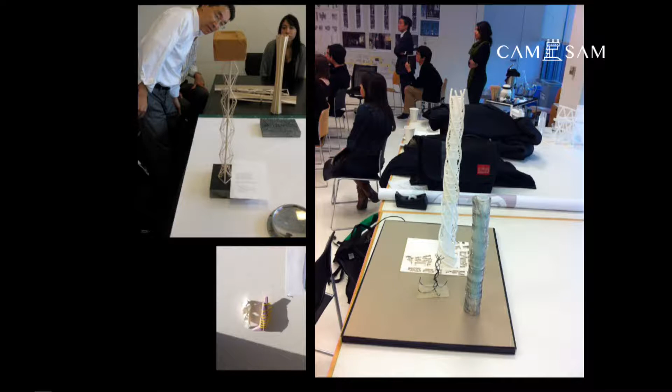I'm a structural engineer, and in our firm, SOM, we practice as engineers and architects together. And we think about design from a perspective that comes from organic forms, from art, from experimentation. So working with universities to develop new ideas, whether they're tall buildings or short buildings, what can we do to change the way we think about design? And most importantly, what can we do to change the path, which we believe is a destructive path on the environment?

Cities are developing around the world at a rapid pace, whether it's in Mexico or Shanghai. And the impact of these cities on the environment is substantial. So the use of natural resources, the embedded carbon that's part of the buildings as we build them, and the carbon that's emitted when we operate these buildings are all creating a great impact on the global, both economic and most importantly climatic situation. The last century, we saw climate change in temperature of 1.5 degrees. We expect that in this next century, it'll accelerate. So greater temperature change.

When we build buildings, most of the buildings that are of great scale, let's say at least 20 stories or more, the amount of embodied carbon in the structure, in the building, the day we built it, in most cases takes 20 years to be overcome by the operational carbon from mechanical systems and lights and so forth. So the day we build, in many cases, is just as important or more important than the operation of our buildings.

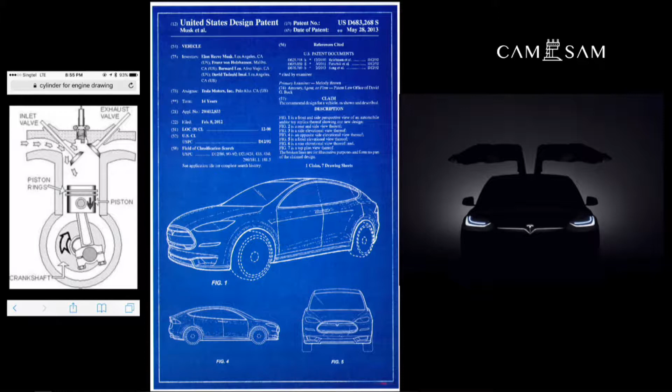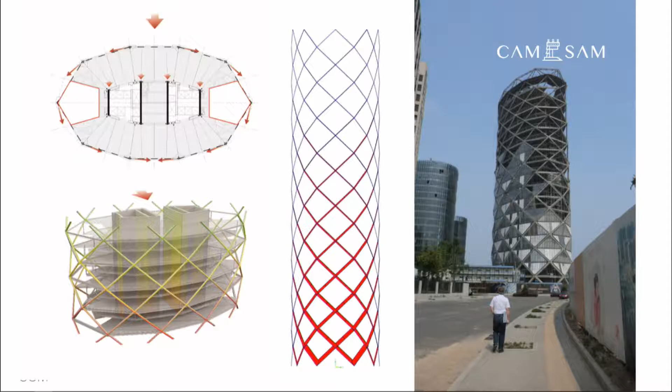In buildings, it's an idea of creating form that is efficient, creates great architecture, we hope. Ideas that are stable, but ideas that take forces and allow forces to flow around a form, to balance gravity loads against seismic loads and wind loads. So taking the helix in this case and allowing the forces of gravity to flow around the entire form to help resist the building from overturning in wind or seismic events. The idea of balancing the placement of material and making the building as efficient as possible. That's our goal. And then creating great spaces.

Spaces where people use and are inspired, whether it's at the base of the building or it's how we interact with the building throughout the elevation of the building and how we celebrate structure as part of the experience. That's our hope, to take the ideas that are fundamental to design and create something that is really unique.

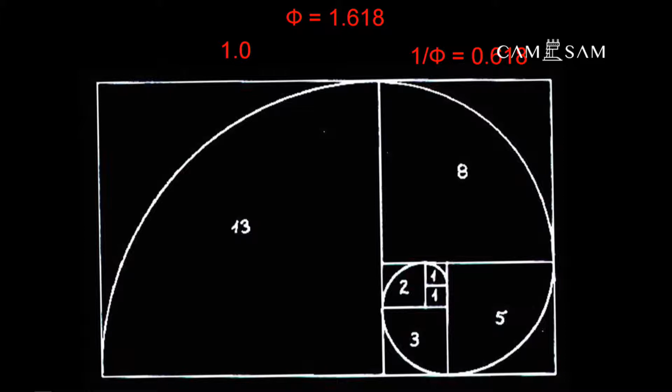The Fibonacci sequence is something that a lot of us have studied. Many people think of it as an incremental series of numbers, but it's far more powerful than just a numeric exercise. The relationship of numbers is interesting. There's a constant that emerges. So the relationship between 13 and 8, for example, is the constant that you see at the top, 1.618. And if you continue out on the Fibonacci sequence, you'll find that, like pi, the number converges. It becomes much more accurate.

So what does it mean to us as designers? Well, it means that it's a search for where it exists in other places. So in nature, the way plants grow, trees, small plants, is impacted by this constant. It's impacted by the geometric lengths of arms of the tree. It's impacted on the numerics that help us describe growth. The leaf in the northern hemisphere on most species of plants points south first. Why? Because that's where most of the sun is seen throughout the year.

But then the question is, where does the next leaf point? Well, in the northern hemisphere, the next leaf will point 137.5 degrees off of the first leaf. And you wonder, well, why is it 137.5 degrees? Well, it's because every single leaf that sprouts after the first leaf will never cover a previous leaf. And you can do that. You can take 137.5 and plot it on a circular pattern. No dot will ever cross a previous dot.

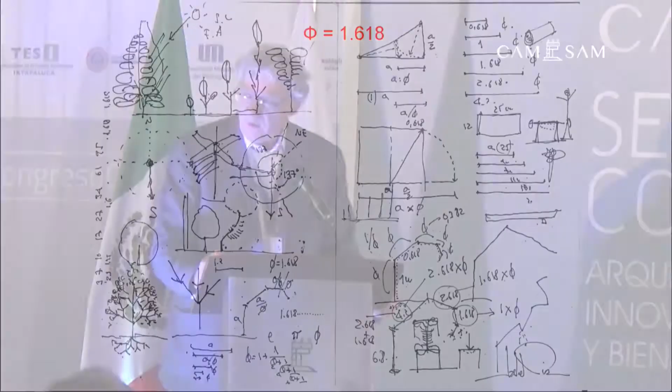So here's the factor again. Well, if you take 137.5 degrees and you relate it to a 360-degree circle, you find that the constant reappears. It's not random. It's in all of us. It's in the way the hair on the top of our heads grows. It's the way the universe has been created. It's the way plants grow. And maybe it's the way we design buildings.

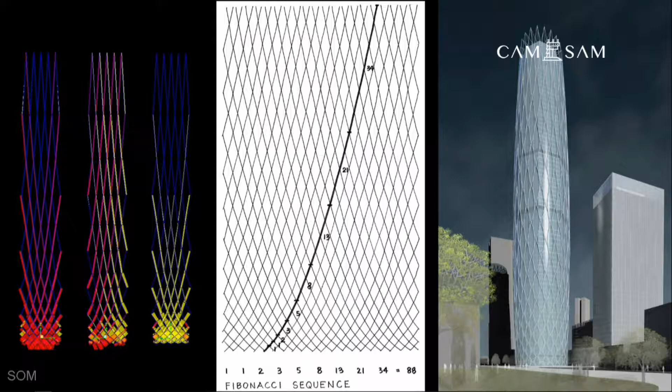So if we take the Fibonacci sequence and we allow it to radiate vertically, perhaps we can create framing systems of structures that respond in a way that's not linear. It's greater density at the base where the demands are highest, least density at the top, and you can see the orientation of the bracing changes as we go over the height of the building. We're finding that with this type of philosophy and design, we can save 20% of the material in that frame.

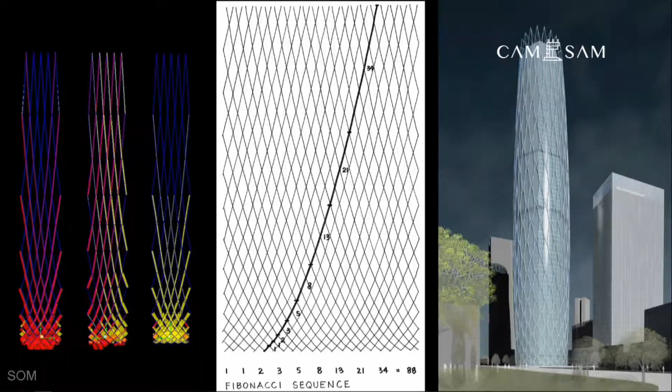We're looking at buildings not like beams and columns. We're looking at them as forms, as geometric forms, whether they're volumes or in this case, 4 planes. And what we find when we apply load to these forms is that bracing patterns emerge that are much different than we're normally used to.

You would think that the bracing pattern for this tall building would be concentric. In fact, it's not. It's a high-waisted brace. This is the most efficient way to resist lateral loads for this tower, for those points of support at the base. 3/4 to 1/4. It's not symmetrical.

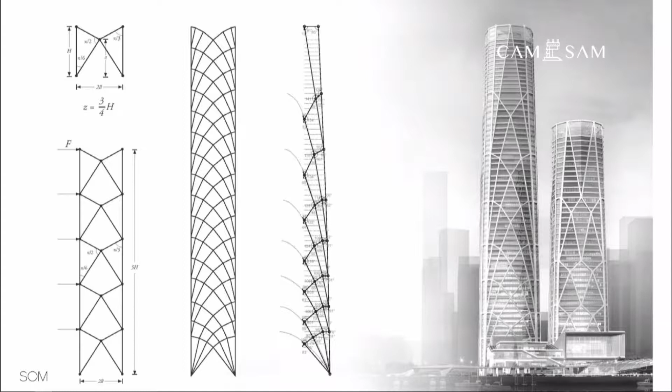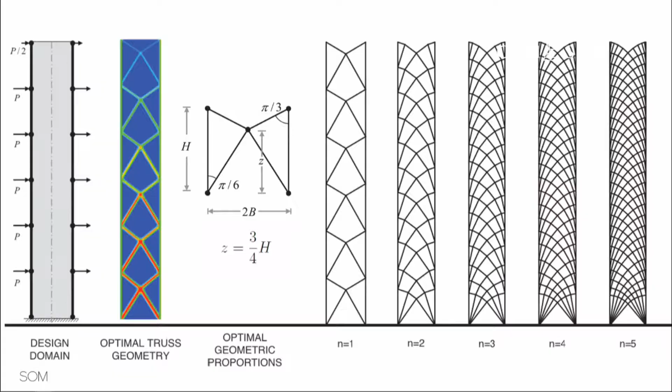And we're taking these optimization platforms, and we're creating first the theory on the left, and then we're interpreting the architecture from the engineering. So it's not such a sterile response. It's a much more organic response. And it's a progression. It starts with the basic idea, the form on the left, the initial engineering idea that's the most efficient, that's in the middle, and then there's a hybrid consideration.

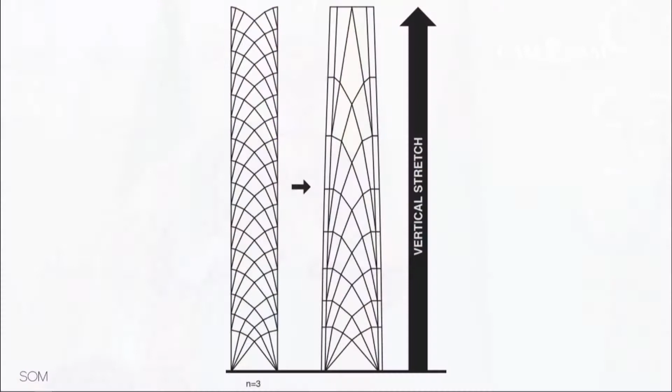Taking that initial idea, in this case as the chassis, and then stretching it over the height of the building to create something that we believe is organic and beautiful and efficient in terms of the way forces are managed.

But in tall buildings, in areas of high seismicity, it's a question of stiffness and softness. Stiffness related to winds and daily events, and softness related to the earthquake when it comes. Dissipating energy when you need to. So creating fuses within these tall building structures is the answer. So we think we've discovered that this combination of stiffness and softness is the answer to tall building design in areas of high seismicity, like here in Mexico City.

You can take these ideas and turn them on a horizontal. So it doesn't need to be a tall building. It could be a bridge, or it could be a long span building. And if you simply mirror the idea around the center point with 2 points of support at the outside, you find that you create a structure that takes the tall building philosophy and puts it on the flat. And it takes that 3/4, 1/4 geometry of bracing in the tall building, and it puts it into the frame of the bridge.

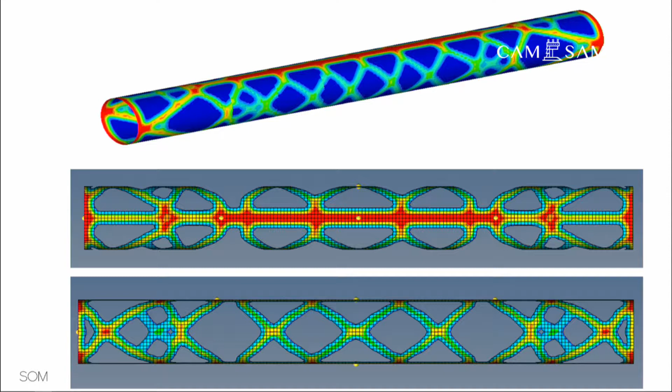This is a helical, it's a circular or an elliptical pattern. You could use it on any geometry. It could be square. You can do it in concrete or in steel. But you can see that these bridges of the future might look very different than they have been in the past.

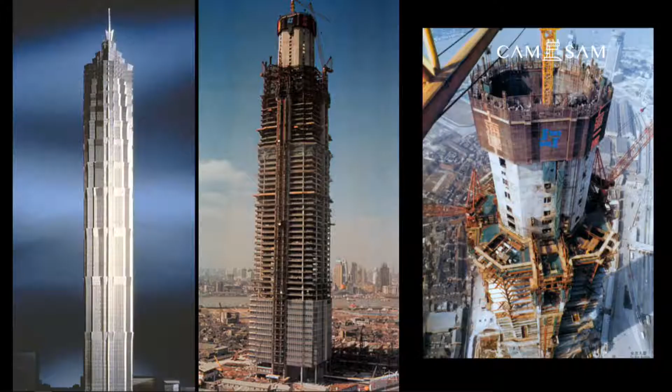So tall buildings are a challenge. They're a challenge of place, material, technology. When I was a junior designer at SOM in Chicago, I had the opportunity to design this building. It's 420 meters tall, and it's in Shanghai. It was the 3rd tallest building in the world. It's called the Jinmao Tower.

And at a Saturday night event with my daughter, we together solved the problem for this building that was really difficult. And you can see the model that's here in the foreground.

My daughter now is 29 years old, by the way, so just to get a sense of time. I have different glasses, by the way, too, and my hair's a lot whiter now than it was then.

But what we did is we took this model, and why did we create this model? We wanted to create a natural force flow behavior in this tower, not for restraint, but actually to allow it to move during construction. So we had these big trusses that connected to the central core, then connected to the outside big columns, the mega columns, and there were 8 big columns.

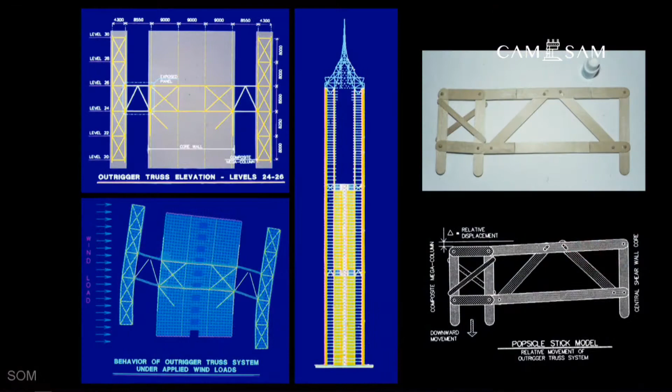And what we found was when we interconnected them for lateral load resistance, we found that if we built the building from the ground up, the creep, shrinkage, and elastic shortening that this building would see between the core and the outside columns would literally rip the trusses apart because the trusses were so big.

So we introduced pins into those trusses to make them behave like mechanisms using wood dowels, tongue depressors, popsicle sticks. Slots were needed and pins were needed to allow the structure to move freely during construction, attracting no force.

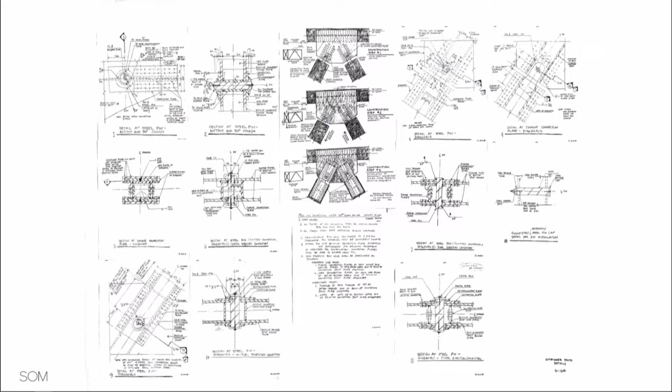We developed the idea into the working drawings, first starting by hand calculations, and then into the computer-generated working drawing on the left, to the shop fabricated, prefabricated units on the top right. You can get a sense of scale on the lower left of a man from SOM that was on site. The pins are in that connection. And the idea is that the pins were in place, in the image on the lower right, and then the bolts were inserted after the building had a chance to breathe.

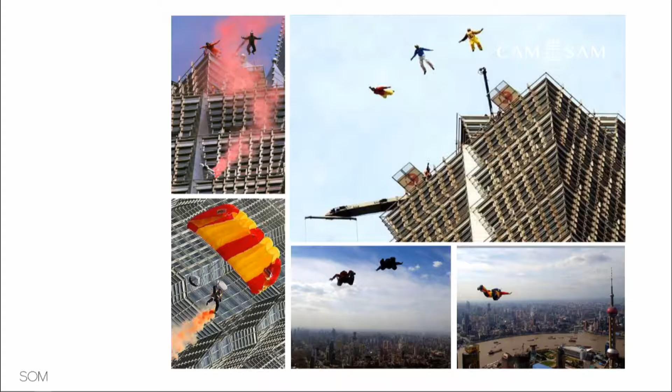So the building today is a success. People jump off this building. People climb this building. And people do things that are kind of crazy, which by the way, I wouldn't do this. So anybody that wants to do this, fine. But this is off of the observation deck. It's the 88th floor of this building.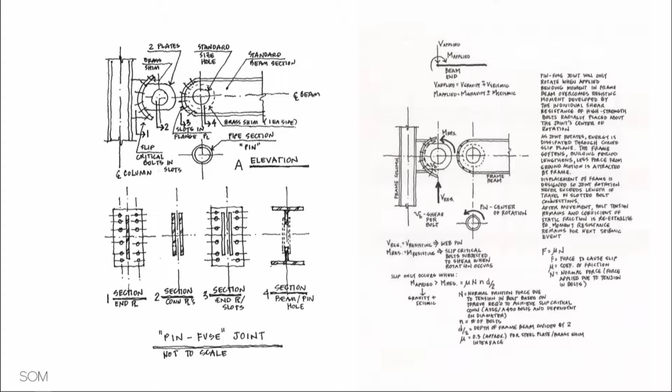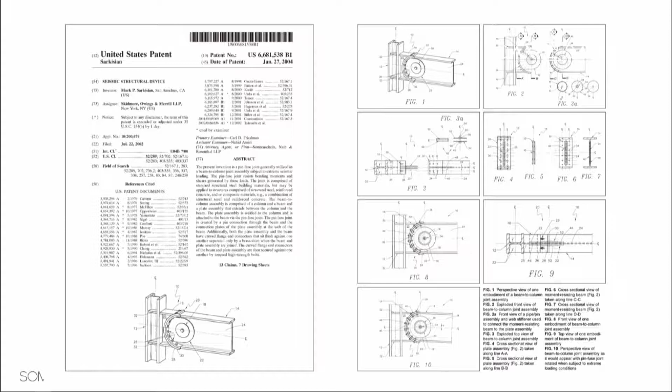So like our bodies, the connections that we have, they're responsive. A lot of times they're not being used. Sometimes they're being used in a way to lift materials, but always they're used in a way that has free motion. Our buildings, on the other hand, typically do not. So how can we introduce pins into our frames of our buildings to allow them to work more like your body than welding beams and columns together in a perpendicular way where it's an abnormal behavior. It's a high concentration of force.

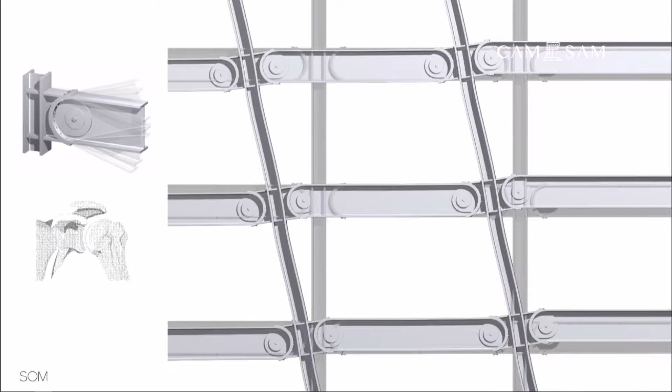So imagine frames in the future looking like this with pins that allow for the joints to be fixed during most of the life of the structure through friction. So the curved plates have a friction material that's clamped together. We understand the coefficient of friction. We understand the clamping force. And we understand when it'll slip when the demand is high enough. It dissipates the energy without damaging the base building.

That's the idea. So long range, the idea of carbon, buildings being in service is really important in the final state of our designs so that we don't have to repair them or take them down and rebuild them.

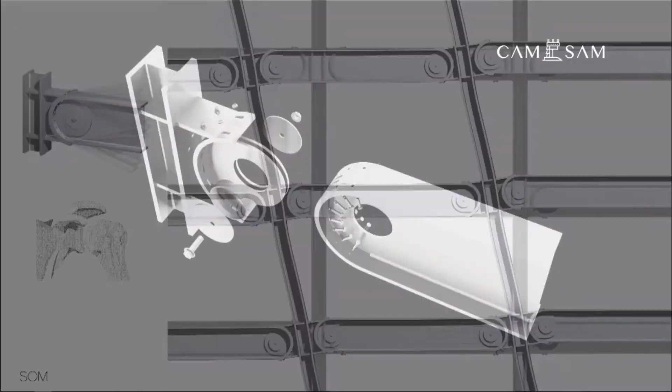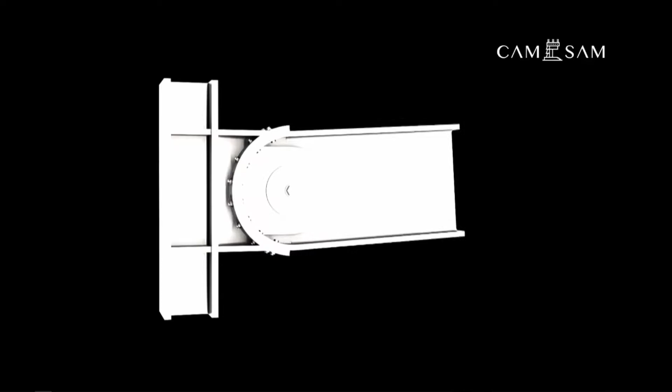So the idea is to use basic building materials that we have available in the marketplace today. Wide flange beams, hollow sections, circular sections that could act like a pin, high strength bolts, friction materials like you use in your car, in an automobile, to create these joints that allow this movement to happen when we want it to happen.

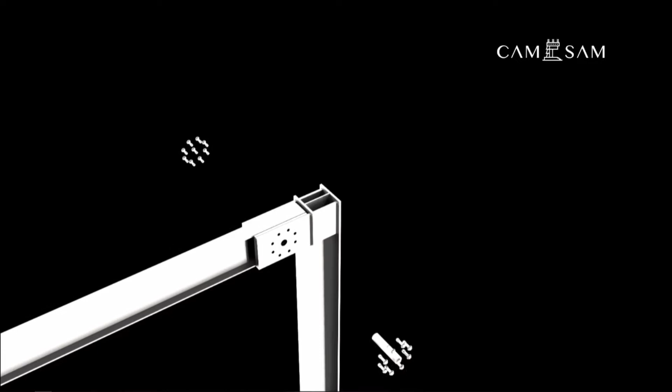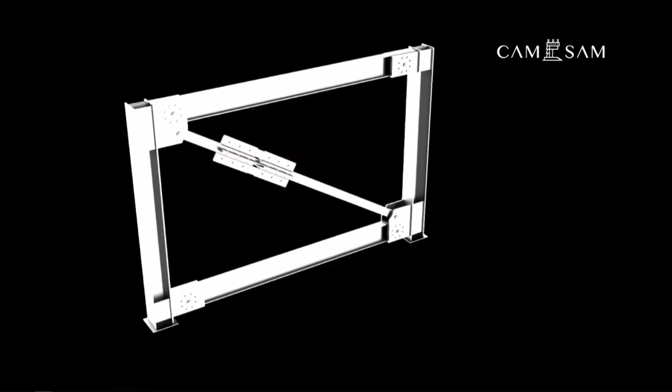We can use this idea in frames, stiffness and softness that I talked about earlier. So braced frames that at the time of a major earthquake need to dissipate energy, but when they're in their normal life, normal operations, they are there to provide stiffness of the structure until the big earthquake comes. But dissipate the energy, protect the structure through this idea of friction. Allow the joints to have circular bolt patterns so that they can rotate freely when needed.

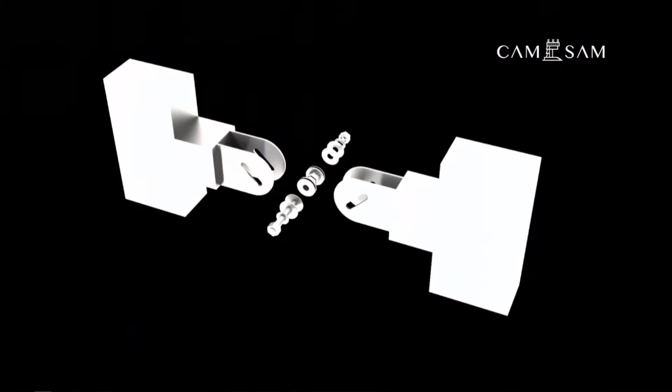And even in structures that have shear walls, we do a lot of residential construction that is concrete. We have links that occur in the elevator lobbies typically to dissipate the energy. Use steel, in this case, in a butterfly pattern that's allowed to dissipate energy when needed.

You can use these ideas in places where you run into trouble, where you have problems, when you're designing a building and you discover that you just can't quite solve it. This structure is in Beijing. The idea was to create the tallest and widest cable net in the world, 90 meters tall and 60 meters wide. And what we would do is hang a mid-height structure, which was a museum, and allow that hanging to do two things: to support the gravity loads for that piece, but more importantly, perhaps, to take the lateral load

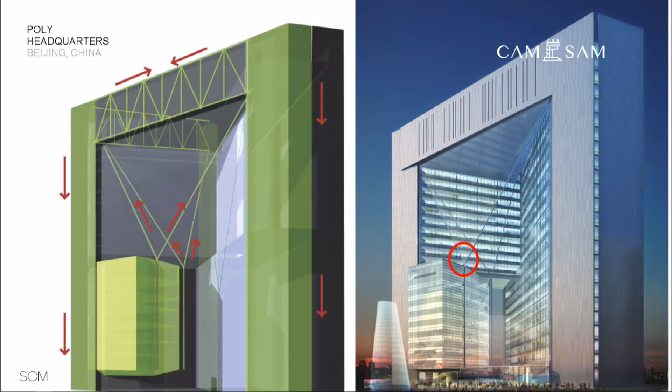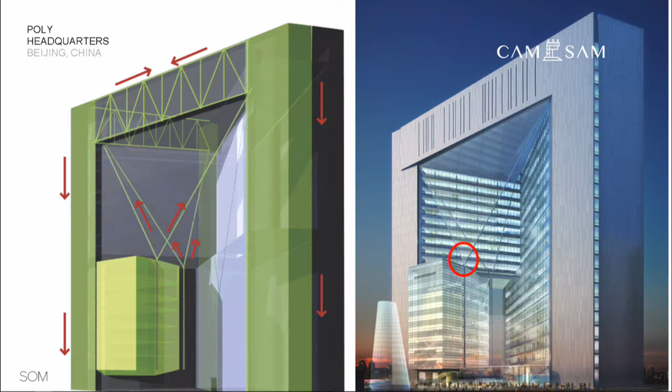of this cable net. But we found as soon as we connected it to the top of the museum, it acted like a mega braced frame in an earthquake. It attracted so much force that we couldn't engineer the diagonals. We'd put material to respond to force. We couldn't design it. We'd put more material, it would attract more force. So we needed to come up with a way to allow the building to act freely during the earthquake.

So what we did is we started with the fundamentals of pulleys. The idea that the pulley, when a cable would run under the pulley and it would move from side to side, the force in the cable wouldn't change very much in motion. But our architects wouldn't allow this huge drum that we would have to create for the size of the cable that we were using. So we came up with this idea of pins, 4 pins with plates

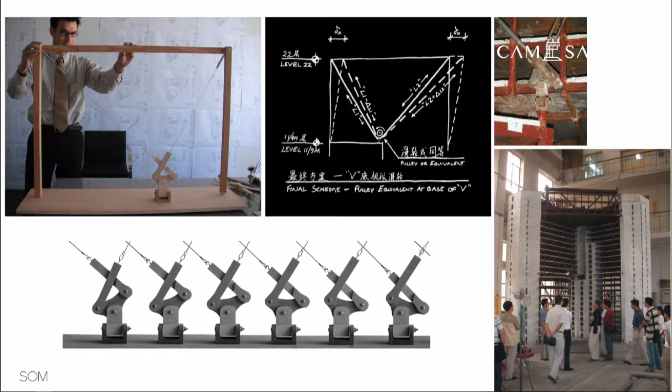to allow the same motion to occur. We took those models and created the in-place structure, which could be used to resist these lateral loads from wind on this large cable net, but also provide motion when needed in the large earthquake. So it is still today the largest cable net in the world, and it's designed to move, even though when you see the building on the outside, you may not see the connection, but from the inside, you certainly can.

So there's a couple of places where we've written about the work. One is in a book for Detail. It's a German company that publishes a lot of architectural details, but they asked us to do a book on structures. And then a book on tall buildings that came out of work with schools, Stanford University in particular, about the idea of structure as architecture in tall buildings.

And what the book does is it takes you through the steps of the site, where not much is known except for the natural characteristics, all the way through some more of these advanced ideas that we're talking about today in terms of the impact of nature on design. So there are resources that are available if you're interested.

It happens at great scale. It's not just at the top of your head or the growth pattern of a plant. These geometries are not random. They're important, and they're embedded in motion, and they're embedded in the way we see dynamics. So in simple wave theory, as you touch that string and change the boundary conditions, you can see that there's a different dynamic characteristic, right?

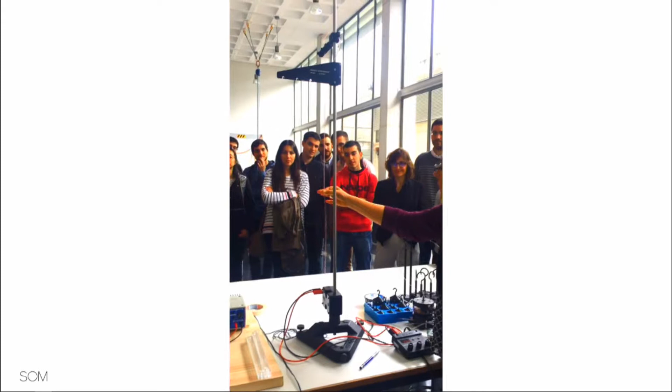Imagine that everything is in motion. Everything. We're in motion. This building is in motion. The planet's in motion. That's the philosophy. So 50 years ago in San Francisco, it was the summer of love, okay? I wasn't there, actually. I was pretty small. But anyway, this whole freedom of ideas, right? Freedom of form, motion. That's what we think is important.

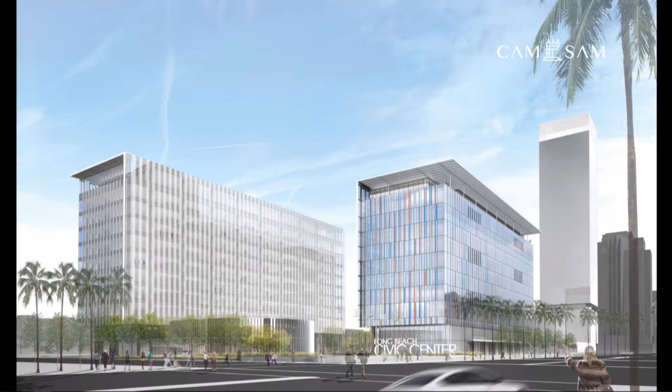And that's what we think actually can get into buildings that are not super tall. Buildings that are shorter. In this case, in Long Beach, California. 2 fairly short office buildings. Simple in plan. Core systems, columns, open office space, structures that consist of shear walls, and post-tension slabs between the shear walls and the columns. But we wonder, what about all these ideas for tall buildings could maybe be appropriate here? And what about wave theory?

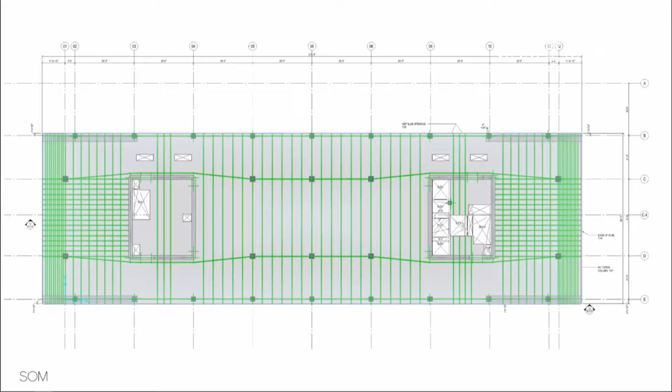Typically when we post-tension these slabs in our buildings, and many of us in the room are involved with this, it's a linear approach with cables, right? They drape vertically, but usually in the horizontal plane, there's not much variation. And this is what we've been doing for literally 60 and 70 years in our buildings.

But if you look at the force flows, they're much more organic. They're like flower patterns. They're not linear. It's not point to point. This is the most efficient path. And if you superimpose an idea of where the structure might be, all of a sudden something beautiful appears, and it's not a straight line.

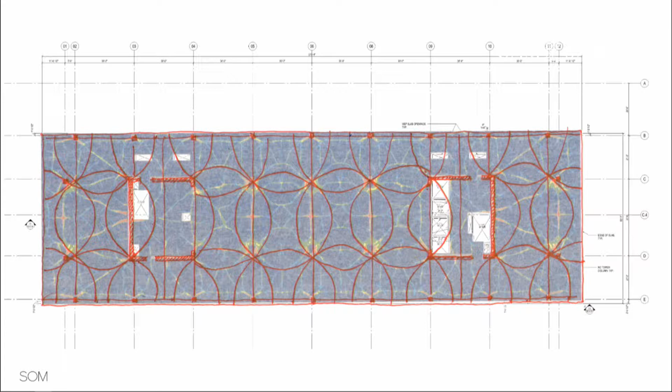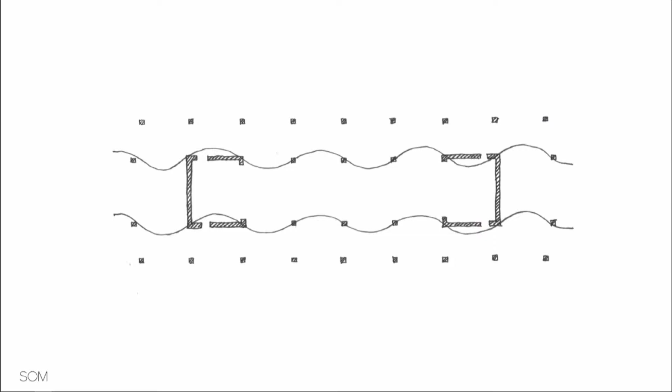So wave theory and placement of cables that you can imagine that are now in the concrete, in one direction, then another, and then the combination of the two, and then the other direction, the other, combination. And when you combine them together, something really beautiful emerges. It's a pattern that looks more like Vesica Piscis and the origins of the universe. And I'm trying to pull this all together. It seems like a stretch, but it makes sense that the mathematics have got to be the same.

So you can take this and you can create grids of placement of material, elevationally and in plan. And what you see are these intersecting circles that form the structure. You can reduce the material by almost 30% when you use an idea like this. It's important for us to think about in our designs.

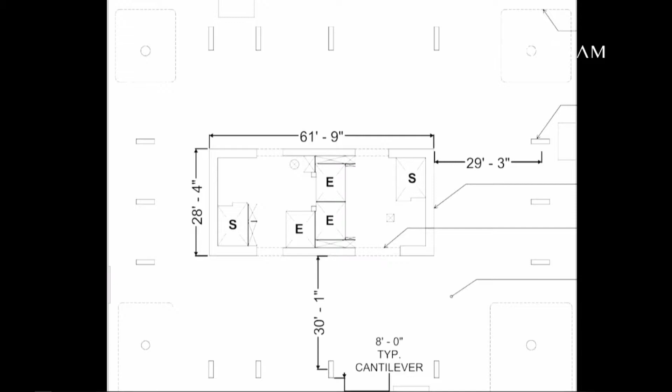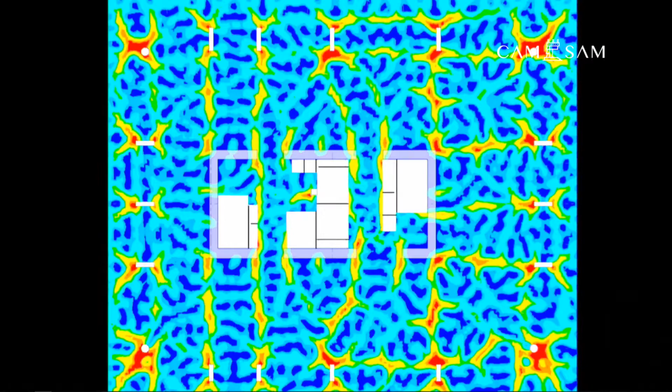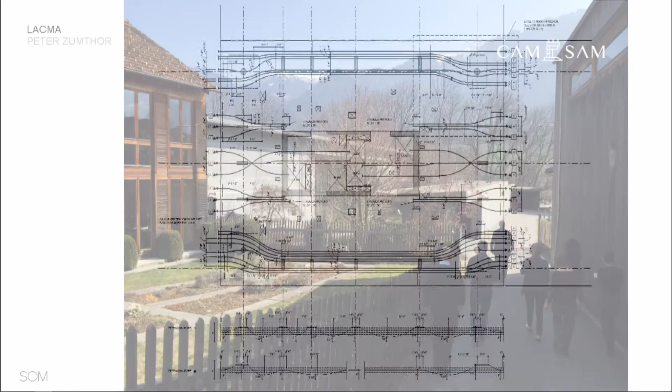Describing structure like it's a musical instrument. So in plan, the idea of the cable placement, but also in elevation like the staff, like a musical staff, so that the contractor can see in plan and in elevation every cable in every position as they lay out the cables in construction.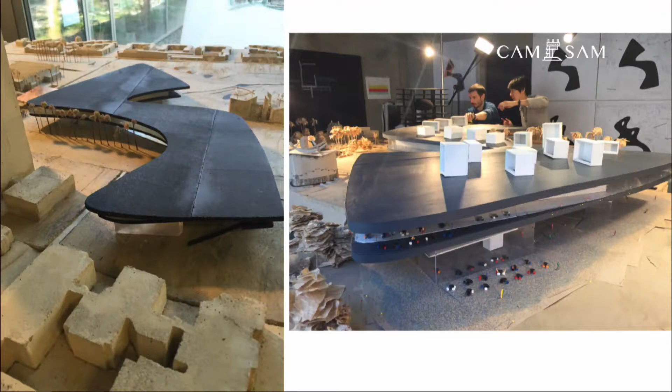This example I'll show you is one that looks at structure from a way that is not conventional. And this is the Los Angeles County Museum of Art, currently under design and soon to be built in Los Angeles. Peter Zumthor, the architect from Switzerland. Peter is somebody that looks at material in a very substantial way. He looks for inspiration. He looks for ideas of placement of material within structure that is efficient, it's smart, it's holistic. In this case, a reinforced concrete structure with very ambitious cantilevers and long spans.

And we too look for organic ways of creating structure. In this case, the least energy is where the lines of this crack pattern exist. But if you reverse it and think about, instead of relieving the structure, maybe that's the area where the highest concentration of structure might exist. It exists elsewhere, if you look carefully, in water patterns.

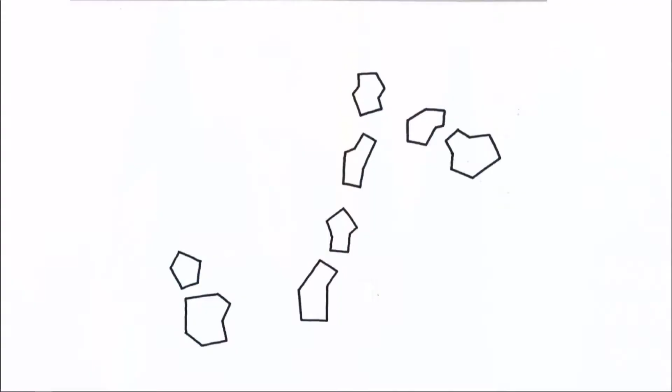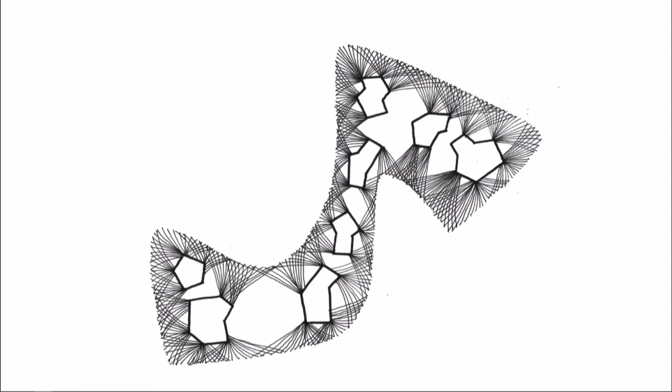And so what we did is we tessellated the structure. And we created an idea that takes Voronoi, a natural placement of material, and creates vertical structure first, walls that are interconnected with walls that would exist on the occupied floors, and arms that would reach from that, and then fingers that would reach from that, respecting this Voronoi pattern, to create spans in areas of efficient ribs that would be able to span the cantilevers and long span areas. And then ideas of post-tensioning in the slabs themselves.

So this, again, this organic pattern of force flow and responding to where the demand is highest and where it's least. And it appears in places that we think are important, like the Venice Biennale. So these drawings that talk about the engineering of a building that's complicated are celebrated along with other art pieces that are part of this exhibition.

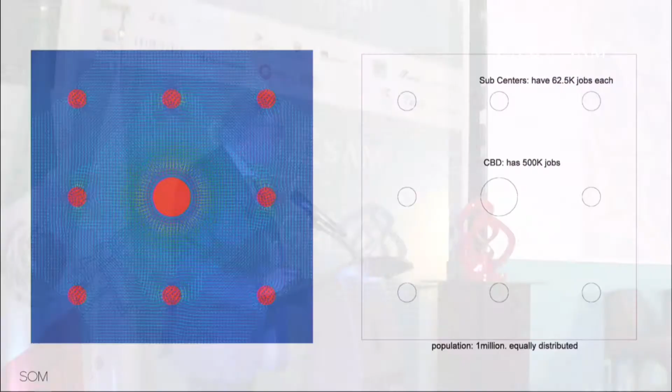So finally, back to this organic nature in art. We think that the engineering concepts that we're developing are appropriate for things like urban planning. And you can imagine that this is a structure with certain sizes of support, or you could imagine that it's certain densities. In this case, the highest density with the largest area of support. Using that same idea of optimization of material, imagine it's people or vehicular movements rather than structure. It's based on the same idea.

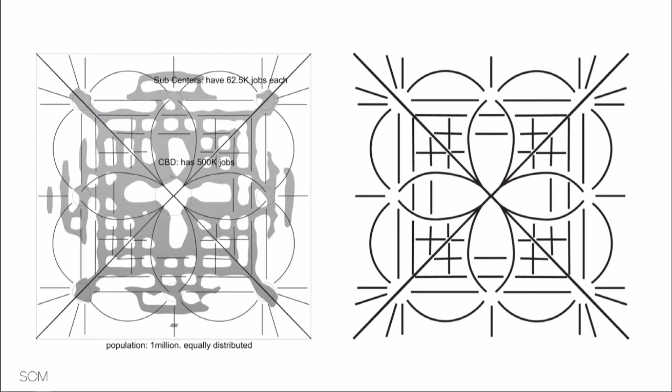And what you find is that the flows that go from point to point, and we saw that just before in terms of the way people use space, is not necessarily linear. So these patterns we think are the most efficient ways of perhaps planning cities of the future. We can distort the plan, distort the idea by moving, let's say, a secondary center closer to the middle. And all of a sudden there's a disruption to that flow, but this is an organic response to that change.

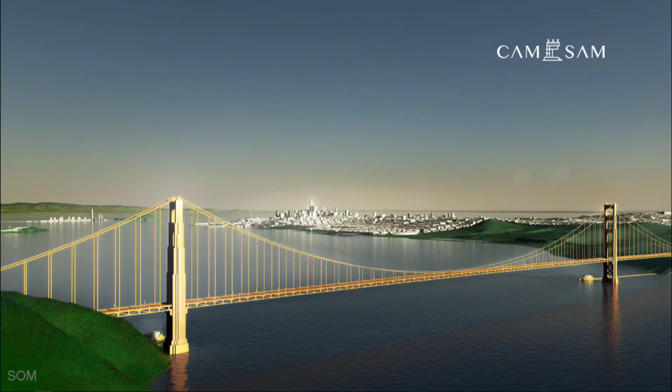So awareness and being aware that there are environmental changes, sitting in automobiles with running engines or using material and structures that's not efficient is all part of this complex idea that we need to make change. And if we don't make change, then there's a backup plan. It's not a good backup plan, but there is a backup plan. So imagine that the sea level is going to rise significantly. And imagine San Francisco and the Golden Gate. What to do if we have 2 meters of sea level rise and storm surge?

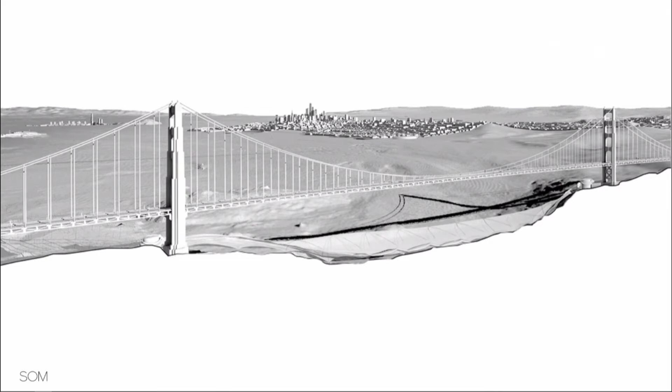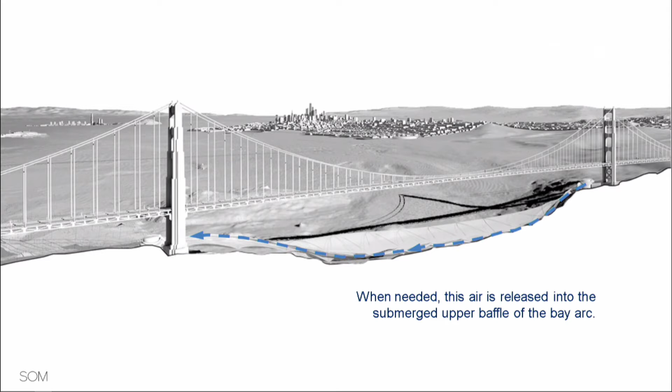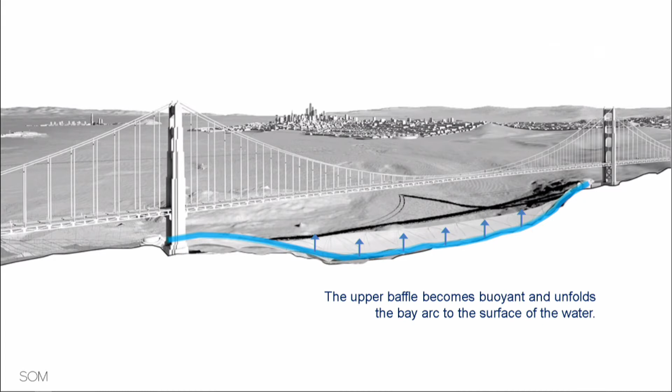Well, we looked at the Golden Gate Bridge and we looked at the bay, and we developed an idea, just in case, where you could actually create a structure that would lie on the base of the bay, allowing ships and sea life to move freely for most times. But when the sea level rises and there's surges, the idea of deployment of a structure that could come off the base and help to protect the bay from the surges is an idea. It's a response. It's not an active response, it's a passive response. It's a what-if response. But using tension in the structure, using a baffle system at the surface that would be deployed with air to help us to protect the built environment.

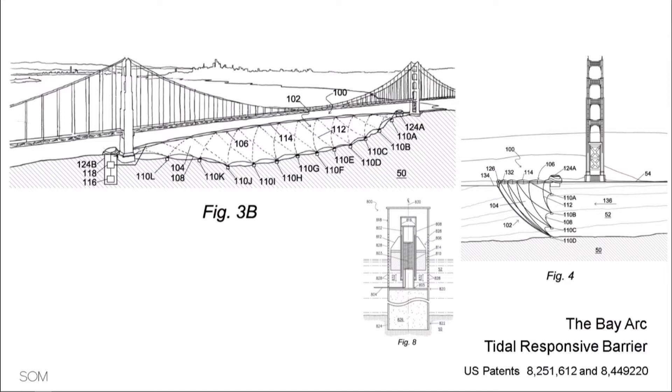So I challenge all of us, me and all of you, as to whether or not this is acceptable. The idea of inventing ideas that protect us but are not proactive, that are reactive. So someday we may see the Golden Gate Bridge like this, but I'd argue this is not where we want to go, that we want to deal with the ideas and the developments much sooner than this. So that's what I have for you today. Thank you for listening.